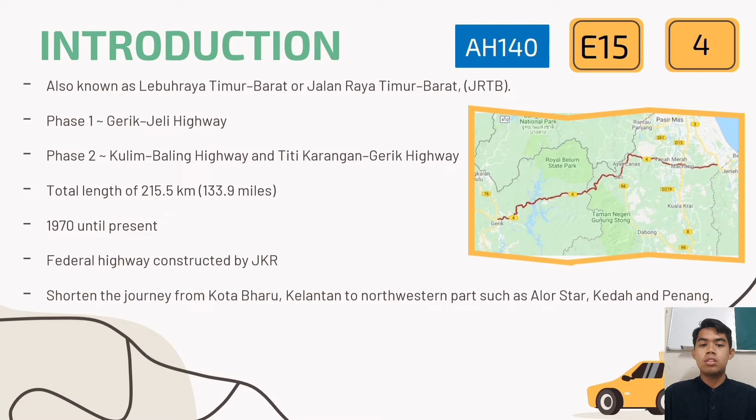The first phase completed in 1982, meanwhile the second phase finished in 2005. Moving to the chronology of construction: it was proposed by the first Prime Minister Tunku Abdul Rahman Al-Haj. It was initially planned to build from Sungai Siput, Perak to Kuala Berang, Terengganu, then changed to from Gerik to Jeli.

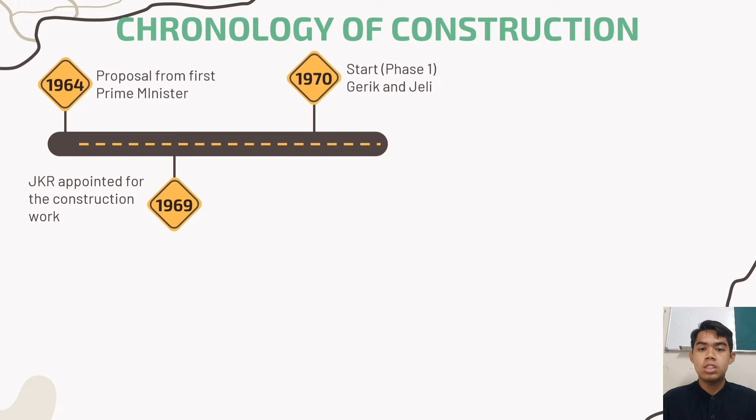In October 1969, JKR was instructed to commence work on the highway with immediate effect as a defense-related highway during the communist insurgency in Malaysia from 1968 until 1989. Then in 1970, construction began simultaneously from Gerik to Jeli, even before any detailed design investigation was carried out. Existing earthwork moving machines were deployed until new machines were purchased.

In 1973, full machines and staff were available for the project to proceed, with military presence in every kilometer. Roads were built to cut off communist activity during that time.

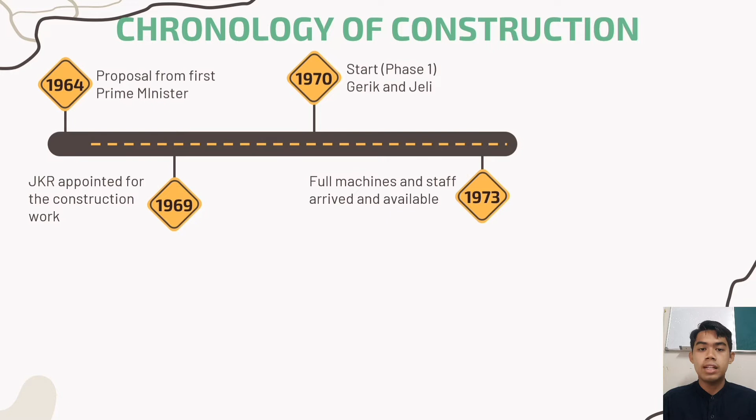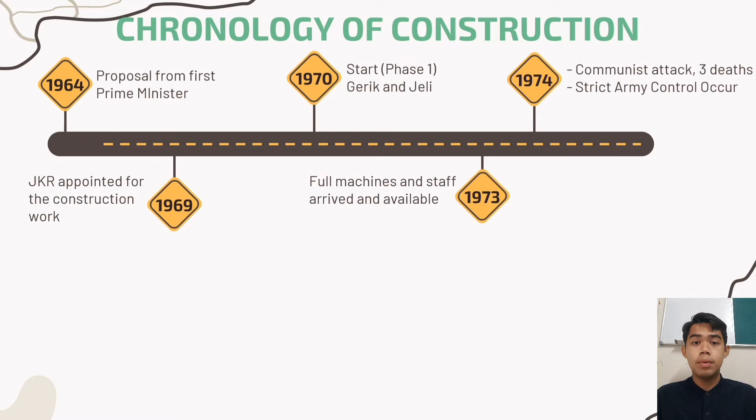In 1974, two separate attacks from communists resulted in 3 deaths among JKR workers and many machines destroyed. After that, in 1974, the construction was put under strict security by the Territorial Army Regiment of the Malaysian Army during construction and during the opening of the highway on 1st July 1982. The military operation was called Ops Pagar.

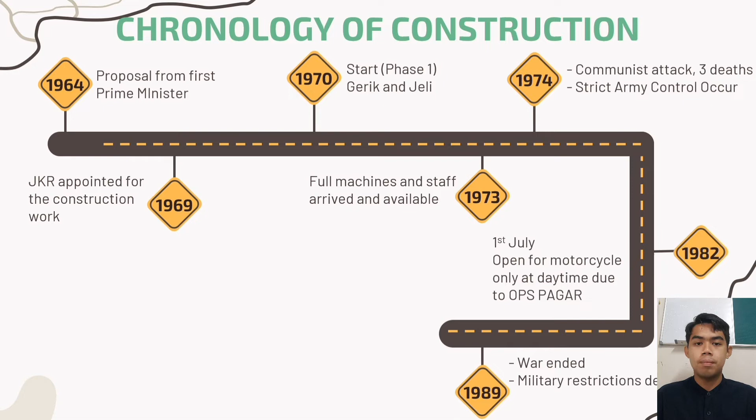In 1982, motorists were allowed to use the highway, but only at daytime due to security reasons. The military control of the highway was lifted after the insurgency war ended. Then in 1993, the highway was extended westward under the Malaysian Highway Network Development Plan.

Construction started with the Butterworth-Kulim Expressway. In 2001, the Kulim-Baling section was constructed first, followed by the final section from Titi Karangan to Gerik, where it links with the original highway. Finally, in 2005, the construction of the highway was completed.

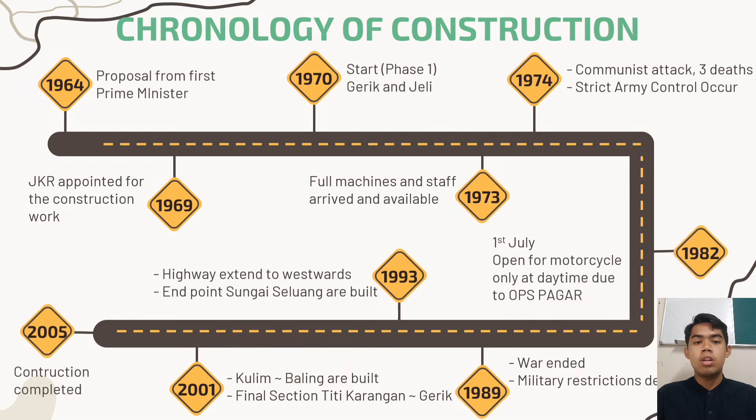The first challenge during construction was the earthwork. The addition of earthwork increased the construction duration as the distance of the highway increased. The process of jungle clearing by the main earthwork team took longer due to communist activity during that time. As work progressed and travel time between the work site and base camp increased, forward camps were set up to house all the workers.

The second challenge is lack of life protection. During the construction, the communists attacked the workers and the construction site. Workers were killed and seriously injured by these attacks, resulting in 3 deaths of JKR workers during that time.

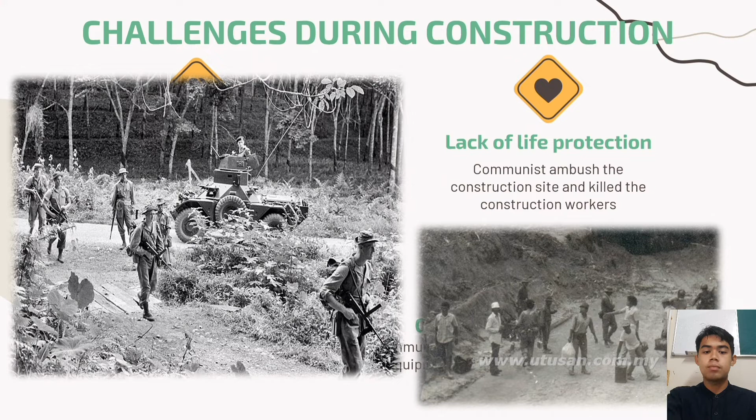The next challenge is the lack of heavy machines. Construction started before any detailed investigation, so heavy machines were deployed from various states until new machines were purchased. During construction, the communists attacked and destroyed about 69 bulldozers, delaying the construction progress. This made the construction of the East-West Highway take longer than it was supposed to.

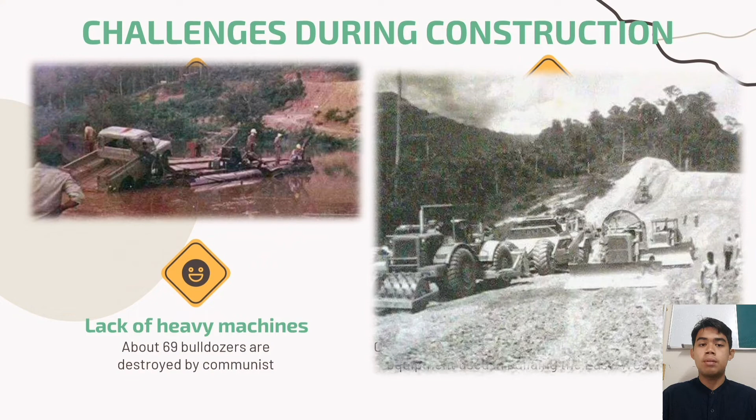The final challenge is the ongoing communist attacks. During the construction of the East-West Highway, the Communist Party of Malaya sabotaged and ambushed the construction site during the communist insurgency from 1970 to 1982.

Next is the memorials after the East-West Highway construction. Firstly, the Malaysian Public Works Department JKR East-West Highway Monument. This monument was erected at a site near Bukit Banding Army Camp on 1st July 1982, where a raid by communist terrorists killed 3 JKR workers and injured others, to commemorate those who died during construction of the East-West Highway, near Lake Bridge.

The plaque reads 'Pengorbanan dalam Kenangan Jalan Raya Timur Barat' - the greatest sacrifice, East-West Highway. In 2014, a reunion ceremony was held by JKR of Perak at the East-West Highway Monument to gather all former JKR workers that were involved during the construction of the highway.

Next is the East-West Highway Memorial Gallery Banding, or Galeri Banding Memori Lebuh Raya Timur Barat in Malay. It's a memorial gallery about the history of the construction of the East-West Highway. The gallery is at the former Malaysian Army Military Sentry Bunker, situated near Belum Rainforest Resort on the west side of Temenggor Lake Bridge, at Pulau Banding.